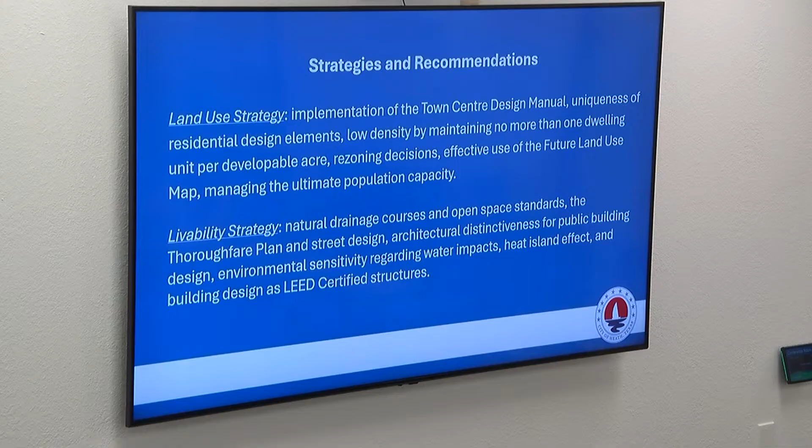Your implementation strategy is probably the more important element of this. Once we take a look at all the goals, strategies, and recommendations, the summary provides a statement for plan amendments that may be made after a thorough analysis of immediate needs, as well as consideration of long-term effects of the proposed amendments. So we'd have to consider what that looks like from a long-term perspective.

Public education and public involvement in shaping our community through involvement and best practices, and immediate priorities for amending regulatory ordinances and other ordinances that require revisions, or creating ordinances that enhance the city's image and livability standards for high quality of life and uniqueness. That's what I touched on earlier—making sure that when we come forward again, the next process would be to bring forward ordinances that bring this plan to life.

From a future land use plan perspective, this is used as a guide. When we take a look at zoning and development standards, we use this as a guide, and in working with developers, to make sure they understand exactly the characteristics and how we want the property to look.

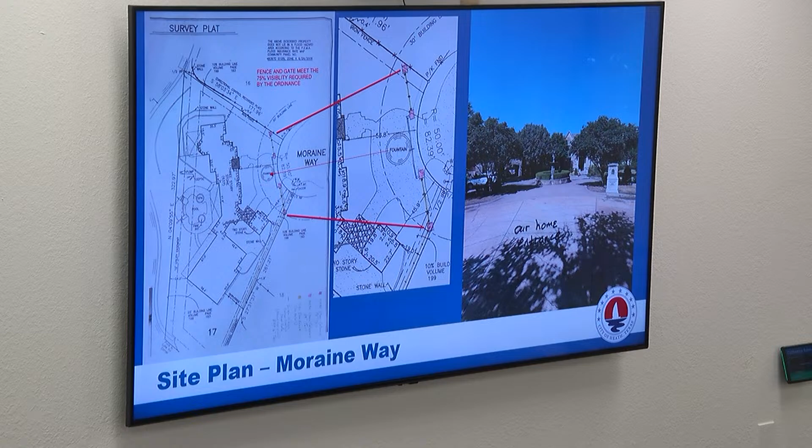I'm pointing to the small map, but I have the big map right here, so we should be looking at the larger map — that's why I did that. This is the front gate design, and this is what it will look like. These are not the columns.

This is just an example of what this gate will look like. It will have stone columns here. The variance for that is not only in the height, but also the columns—where the gate is located, 30 inch by 50 inch—and then the other two columns at the property lines are 30 by 30. Those exceed the minimum and maximum requirements that we have.

This is the next door neighbor. This is what they are trying to achieve, the look of this stone. They want to be consistent in the neighborhood so it doesn't stand out, and they're tying in also at their property line with the fence that runs along here.

There's already a wrought iron fence that runs back this way. They'll include the wrought iron on the other side of the property. In the neighborhood there are a couple of others that existed prior to the adoption of this ordinance, with 6 foot tall fences and 10 foot tall columns. Because of the circular drive, the cul-de-sac, that's going to create a variable distance for the setback, so that's part of the request here.

The request is for a variance for a maximum height of 5 foot tall ornamental wrought iron front yard fence, to be located within the variable distance from the property line—i.e. the cul-de-sac—and an 8.5 foot tall gate crossing, also within the variable distance from the property line, which is supposed to be a 15 foot setback, plus a maximum width of the columns being 30 by 30 and 30 by 50 as opposed to 24 inch, and a maximum height of 8.5 feet for the ornamental wrought iron gate, and masonry columns not to exceed a maximum height of 7 feet. So we have a total of 6 variances associated with this request.

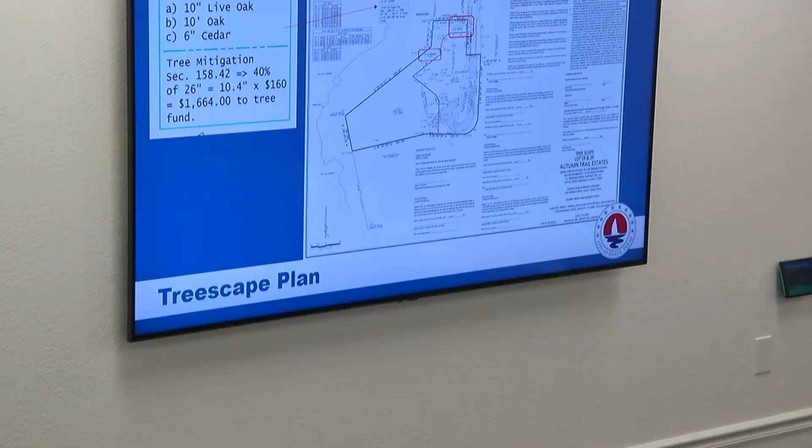Thank you, Councilman Dodson. Any other questions for staff, council? Got one question, Mr. Mayor. Councilman Myers, you said the entrance, I'm looking at it here, lot 2. We'll go back one more. So they're splitting this, the entrance to lot 1 would be right there, yes, right there then. Correct. So then they would basically make the entrance to lot 2 down somewhere along in that area there. Yes, sir. Okay. Very good. Any other questions for staff? None? Very good.

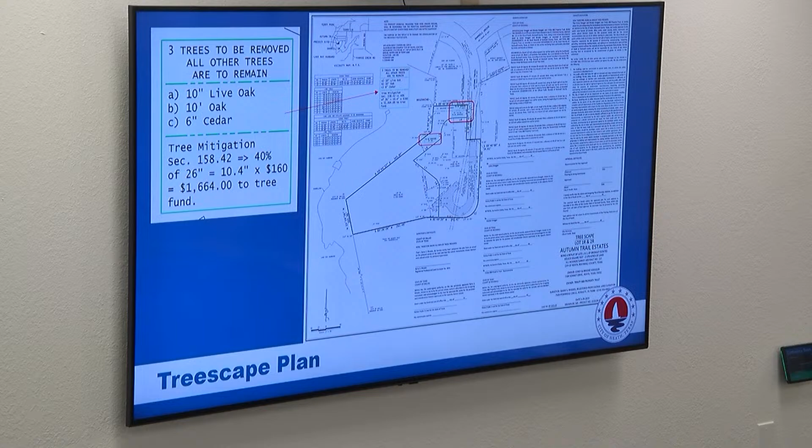Thank you, Mr. Gonzalez. All right, at this time, the chair will open the floor to entertain a motion. Motion to approve by Councilman Dodson, case number RP 2025-05. Thank you, sir. Do we have a second? I'll second. Councilman Myers is the second. The motion moves. All those in favor say aye. Aye. Passes unanimously. Thank you, council.

Moving into 5.d, discussion and action regarding a contract for professional services with AGCM, not to exceed $245,272. AGCM will act as the owner's representative throughout the design and construction of DPS Station number 30 and DPS Station 31, and any matters related thereto.

Mr. Morgan. Good evening, or I should say, the Honorable Captain Morgan. Good evening, Mayor and Council.

Tonight for consideration of the professional service agreement with AGCM to act as the owner representative for the design build contract with Grossman Design. Appointing an owner representative is a requirement for all design build contracts on public properties. AGCM is intended to represent the best interests of the city throughout the project. If you recall, the contract with Grossman Design is contingent upon selecting an owner representative. The contract has been reviewed by legal and Chief Siri has checked references. With that, we have members of AGCM here to present and to answer any questions you have. Very good. All right. Thank you.

Council, any questions for Captain Morgan? We'll have AGCM. You would take the lectern, state your name and your address, please.

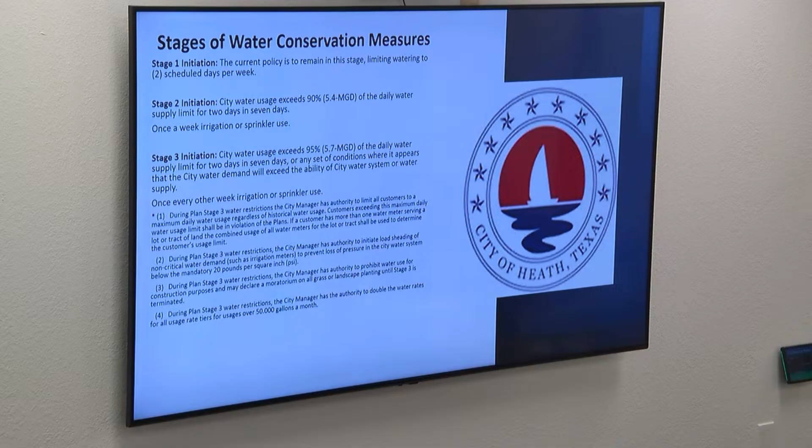The water conservation schedule for stage one year-round is set by zones. The mayor referenced some of the work we've been doing looking at those zones, and we even had a meeting that Councilman Mormon set up that was super fun for me. I loved it. There was a guy there that spoke my language, and he had me standing up with him before it was over, and I was like, oh, this is his meeting, well, I need to sit down. But it was really great, and this is the schedule we're working from right now on the zones.

This is stage 2. If we go to restrictions, it'll be 1 day per week. This is all in your enforcement plan, or your water drought contingency plan.

This is some of the communications we've done. We've got signs out at most entrances to all the communities around here, subdivisions. You'll see the blue or red signs that talk about the water conservation schedule and the water restrictions. There's a QR code there you can click on, and it'll take you to our WaterWise page where you can get some of the assets, the Water My Yard app, Smartscape, things like that, to help us be good stewards of our water.

We even have a new social media brand ambassador I saw today. I know not what you speak of.

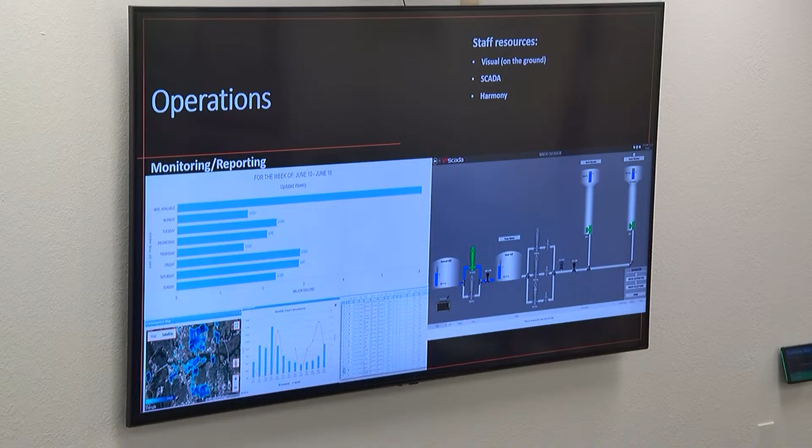The TCEQ requirement was part of why this document came before the old council a few months ago. Previously, we had an ordinance that adopted 2 separate plans. It was kind of a way to try to get through the legal hurdles of not building our own plan. So they adopted North Texas's plan and Rockwall's plan and said mesh them, but it was an adoption of both plans. And when the TCEQ reached out to me, they said you need your own plan. So we took North Texas's model plan and built Heath's plan from that.

There are relatively no changes, because you can't. We have to follow: if North Texas declares a stage because of source water problems, like the lakes getting low or something like that, subsequently Rockwall must, and subsequently we must. So you're stuck to their plan no matter what. You can make minor changes, like we're doing with our enforcement, and obviously if our capacities change, then our percentages change, things like that. But overall, the stages are relatively representative of everywhere within North Texas's region.

Every other town around us is also governed by the 2-day-a-week watering. Whether or not they enforce it is another story, but the rule does exist for those people. Right now, enforcement—and I believe this is still correct—the first offense is you get a notification that, hey, you're watering, or we've noticed, and this is obviously on stage 1 when we haven't met any requirements to trigger further restrictions. The second offense is you get a notification and a citation.

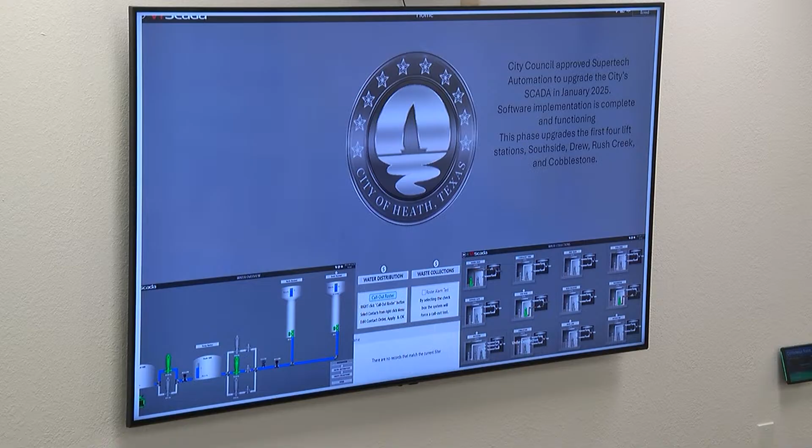Can you refresh me on the numbers here? We got a 250 not to exceed and the cost of 84,000. Can you explain that? So originally, the council budgeted in the CIP item on the approved CIP list was $250,000 for SCADA work. Up to this, we spent, I believe it was 90 - I apologize for not having that in front of me - I believe it was 92 for the original stand-up, and then we still have left the 160,000 in that line item for this next phase. So that's where the 250 comes from. That was what you guys budgeted in the CIP for SCADA upgrades.

Okay, and so do we have the sufficient power that is needed to run the software or the panels? You mentioned construction cutting a line. It sounded, once I heard it was a weed eater or something, but do we have the appropriate bury of the power and the appropriate power needed for this? So all of our critical sites, which is our largest lift station, our pump station, our water tower, our public works building, the facility here, all have generator backups for power. The SCADA system is on radio. The reason we had the call-out box on the tower where the line was cut, that caused that, is because the SCADA didn't have the capabilities to say, hey, I'm broken.

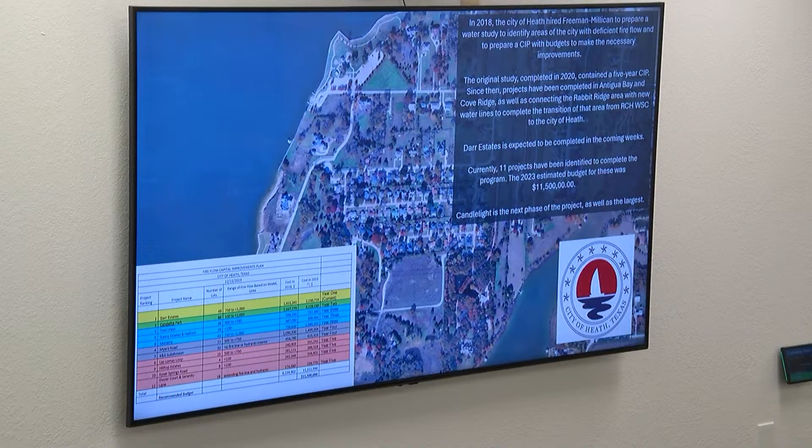I just have what the scope is. Do you have what's actually in the CIP, the updated CIP? I don't believe it has engineering - it's actually less, but yeah, we budgeted $484,000 in the 10-year CIP, but it's just way under for the design. I don't know if you saw in the back, we had what we think the budget would be recommended for today. It's actually a little bit less than what's in the CIP that council looked at a couple of years ago when it was put together.

That's what I was looking at on page 275. I didn't have any recollection, and it didn't have a call out. Obviously, this was before I became the mayor, but I was in the council meeting whenever they went through it. Okay, and y'all may remember Darr is under construction now. Correct. It came in quite a bit less. And we had a contractor that really wanted the job, and he's doing a good job. He's not as fast as he said he would be, but he's doing good work. You don't always get that lucky to find somebody that's bidding it, that needs the work and gives you a good price - kind of luck of the draw. Okay, very well, thank you, Richard.

All right, council, do you have any questions on this item for staff? This is the second neighborhood behind Darr, as you mentioned, right? It is south of Darr. No, just on the priority list - yeah, we're following the order that was established at the meeting.

So Jay mentioned that this is sort of within our costing expectations. And I know that the mayor was a huge proponent and driving force behind taking it from an 11-year project and working with you all on figuring out could this be done less, and you all came back with a great accelerated timeline. That being said, is this 5-year project still on track? And are we still on budget with what we expected from an overall cost of implementation? I think we're under budget - yeah, we're under budget for Darr Estates.

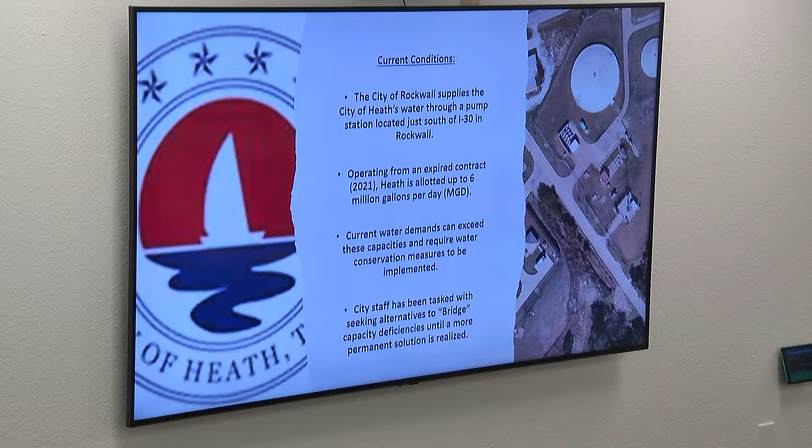We're operating from an expired contract from 2021. However, that contract did state 5.5, but we have an agreement with the City of Rockwall to take 6 at this point. Current water demands can exceed these capacities and require water conservation measures to be implemented. City staff has been tasked with seeking alternatives to bridge capacity deficiencies until a more permanent solution is realized.

Okay, so this is the overview of the bridge plan. You've all seen this graphic, I think we put it out some months ago. Suzanne's great work. The overview of the bridge plan is 6 wells with a potential increase of 4 to 6 million gallons per day, depending on 400 to 700 gallons per minute each. We're hoping for more toward 700, obviously.

Town Center well number 1 is located in the Town Center Park. Bids were open today. Water lines are currently being installed through the Hill and Wilson change order. Bids open again, and we can talk about that a little bit.

The water lines are currently being installed - one that goes to the pond and one goes up to the tower through the Hill and Wilson change order we brought to you guys last time. The bid package for treatment and controls is under review.

The next part is the 1.5 million gallon elevated storage tank on Governors. This was always a design in the water plan. This lot was actually carved out of the development for a water tower. I don't know if you ever drove down Governors - there used to be a sign standing up there. There's a new one now. The old one rotted and fell down, but we put another one up. It says it's a water tower site.

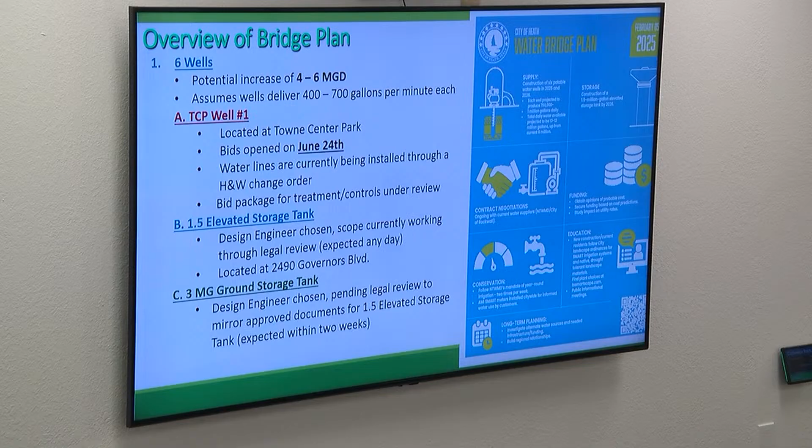The 3 million gallon storage tank - design engineer has been chosen. We're waiting on legal review of the first order before we write the second one. It's the same company, so we want to get through all those steps before we start writing this one, but we expect that within the next few weeks.

Wells 2 through 6, preliminary sites have been identified. Number 2 is to be located at the north elevated storage tank, that is over there by Fulton Academy. Number 3 will be located at the new elevated storage tank on Governors. Number 4 to be located at the Heath Pump Station, that's actually in Rockwall. Number 5 and 6 are tentatively located near Chris Cuny - I'm thinking probably behind the fire station area, somewhere back there out of the way, to make everything kind of flow together and match and not impact the property greatly.

Wells aren't very large. A design engineer has been identified - we already have the well designed through Kimley Horn. They've already designed a well at 3,400 feet and done all the technical specifications. These wells will be essentially identical - the depths may be a little different depending on where they are on the aquifer, but the design is the same: casing size, the hole, the tubing, the pump size, the electric requirements, all that will be relatively identical. It made sense for speed for us to do that, and we met with them today concerning that.

They are working on getting that scope out, and they hope to have that to me by the first of next week, and then I'll send it through legal review and get it to you guys.

Part E is the contracts for the purchase of water. As y'all know, we meet with Rockwall working on these water contracts, and that is ongoing. We'll have further discussion tonight in executive session on where we are.

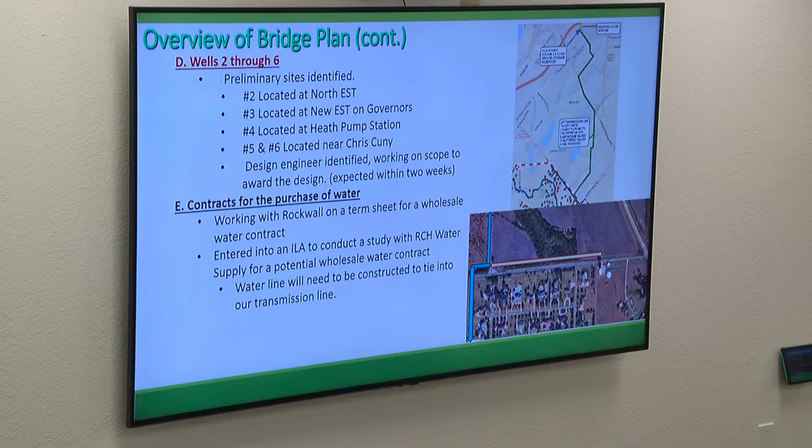I got a little graphic there. You can see on the top one, that is our transmission line that originates in Rockwall that comes down to Heath. And then you can see where their pump station is located there on Laughlin, and our water line comes down 2,500 feet to the west of it there. If we chose to tie in there, there's some thought to moving that on down around the corner and bringing it to a horizon where we'd get into some PVC, which may be more feasible than trying to tie into that reinforced concrete pipe there.

So water wells 1 through 4, like I said, are relatively easy. I say easy - nothing's easy about this process, but they're straightforward. They're holes in the ground next to existing storage.

Well number 1 is located at Town Center Park. We're way involved with this one. We already have the water lines laid, and we've already identified where the treatment's going to be and where the well site is going to be. That well has a dual role - it's more than just potable water, it's also irrigation for our fields and things in our park.

Wells number 2 through 4, that we're waiting on the scope for, are at North Tower and Governor's and at the pump station. These are the straightforward ones that would only require us drilling and setting a treatment hut or building next to our water tower and going straight in there for our blending.

Wells number 5 and 6 are a little more complex. We're discussing that with the design engineers now. There is no storage nearby, so that makes blending a little more challenging. We're also being mindful of what district is nearby - is there going to be restaurants nearby, things like that - so blending is going to be more important than ever. It may require some additional storage, which would drive the price of these to be a little more than the straightforward holes in the ground next to our storage tanks. So that is what we're looking at on that one.

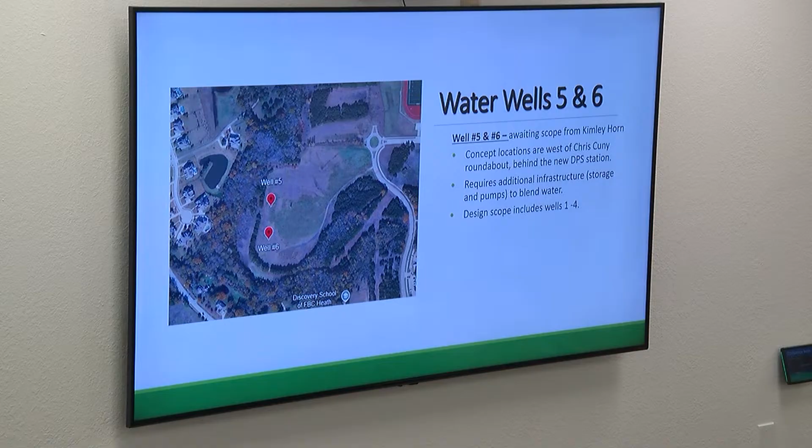Mayor, can I ask a quick question? With well 1, you mentioned that in 4 months it's going to be ready for irrigation - will that be irrigation of the park area, out to citizens, or just the park area? It's just the park. It will pump to the pond, and then the pond will pump to the irrigation. There's a pump in the pond that sucks out into the irrigation system. Okay, thank you.

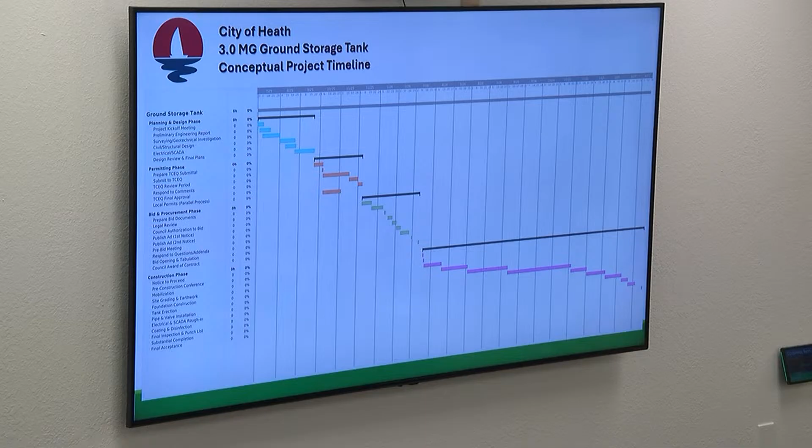Y'all have any questions on these? I don't know if y'all saw them in your packet. We have a conceptual timeline based on our 1.5 elevated. What does the end of that say, since there was no way I could read it? I believe it says March 2027. April, okay. He sent this in an email, Scott. I did, I have it here. Let me, yeah, I've got the dates. I just, on this one, it was tough. So, okay, yeah, I've got that, Brian, in your deck.

Okay, good. We don't have this scope back yet, so, but as soon as we do, we'll start the timeline. That was part of the request I had for the design team on this, was this had to be built as quickly as possible. Right.

This is also contingent on well 3. We can't build well 3 until we have the storage at Governor's, because there's nowhere to pump the water. I mean, you could pump it straight into the neighborhood, but they'd be straight well water. So there are some other elements in timing we gotta work through.

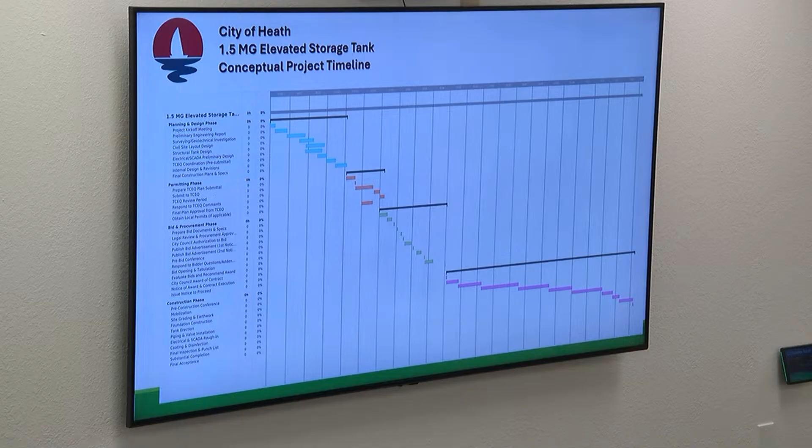Okay, so here's where we are on the wells. Well number 1 is in the bid phase. We opened a bid today. Well number 2 at the North Tower is in preliminary planning and design phase. Wells 3, 4, 5, and 6 are all in the same scope. I met with the design engineers today, I had some here, some on Zoom. They're very aware of what we need, and they're working on it.

The conceptual completion dates are governed by other timing issues. Obviously, well number 3 is pushed out because of the tower, and wells 5 and 6 are more complex. If it requires building an entire pump station, although on a smaller scale than our pump station in Rockwall, there's going to be a lot more involved in that.

And Jay, would you like to discuss the utility rate study portion and the funding? I'll come back up here. Thank you, Mr. Creed. Good evening, Mayor and Council.

Willdan is the firm we've used previously in the 2020 utility rate study that was done. I spoke with Jason Gray with Willdan, and he told me the utility rate study model should be completed by this week, and so we will be meeting with them next week to review the model. Additionally, I guess everyone's well aware of Jim Sabonis with Hilltop Securities. He's working with us on the debt service for this water bridge plan, and we'll continue to work with him as usual to get that underway.